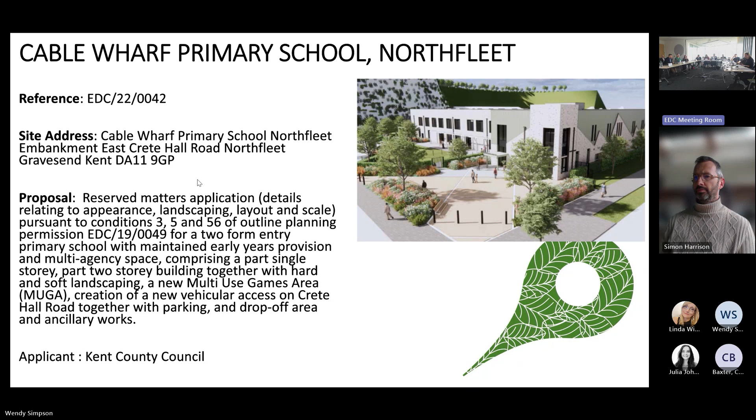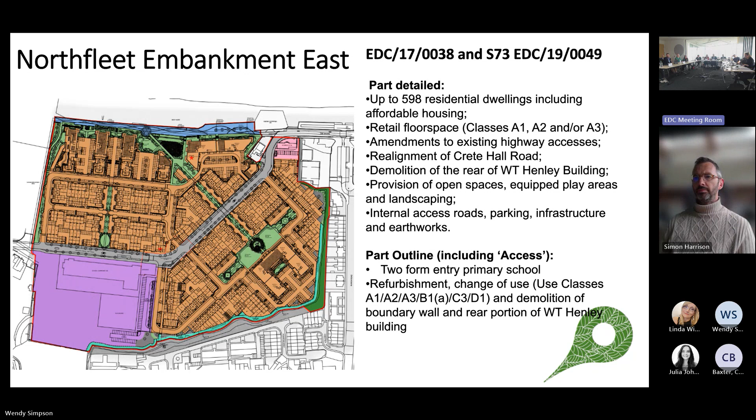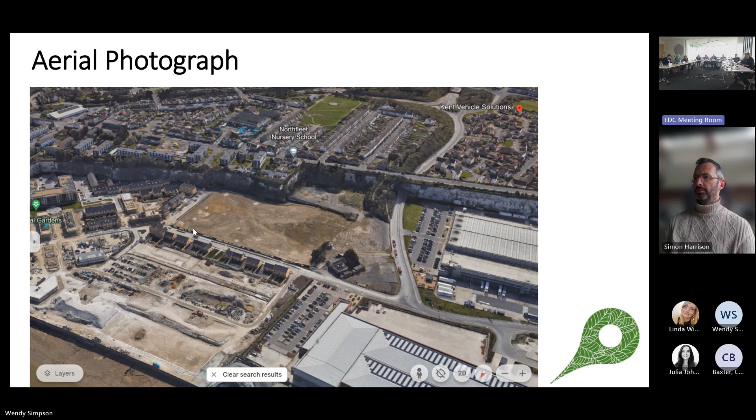The site itself was historically part of the Rosherville Pleasure Gardens and is now mostly flat and bare. The cliffs to the rear of the site are known to support roosting and feeding bat populations, and the proposal has regard to the need to protect habitat and spaces, as well as species, and to the living conditions of neighbours surrounding the site.

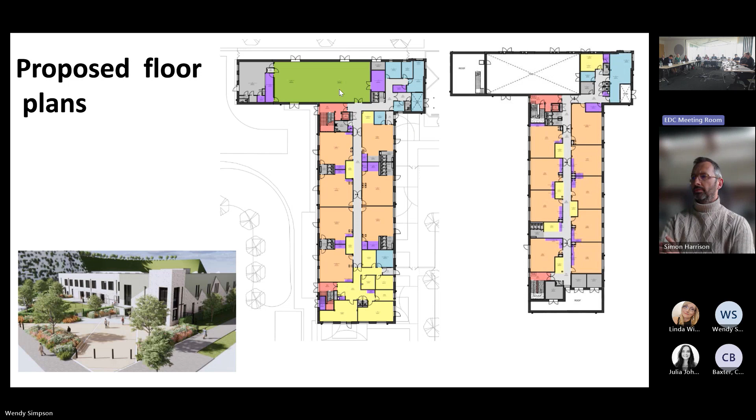Internally, the configuration of the school has 3 key areas: classrooms facing east and west, the staff area across 2 storeys, staff and admin support in the blue area in the corner of the building, and fronting Crete Hall Road is a double height school hall and kitchen.

The energy statement supplied with the application details measures to achieve a carbon net zero school, including the use of air source heat pumps with air terminals on the roof, a large photovoltaic array on the roof of the building, planting of a green roof, very airtight and efficient building fabric, and the installation of electric vehicle charging points. If carbon net zero is achieved, this will exceed the outline planning permission requirement of BREEAM Excellent as an efficiency and sustainability target.

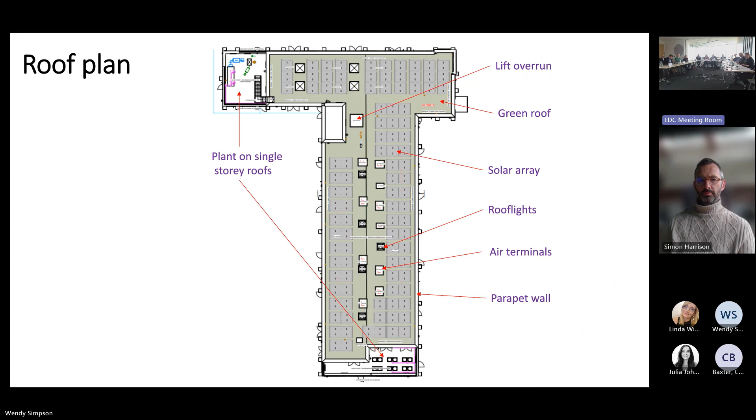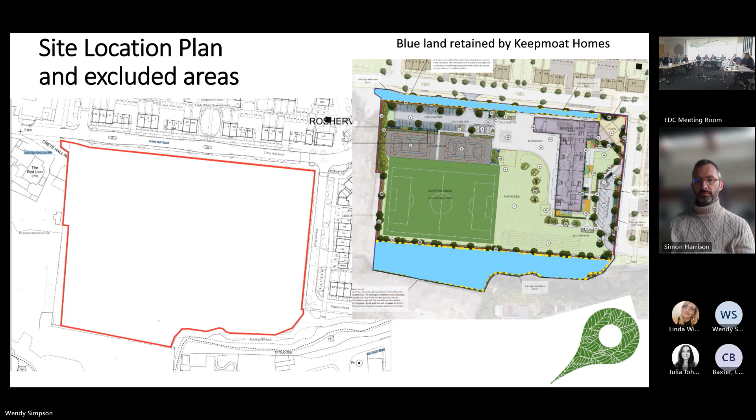The layout of the site is very logical and efficient for use both by the school and the community, which is a requirement of the Section 106 agreement. The layout allows for direct access to the classrooms on the ground floor level, and also includes dedicated outdoor teaching and play spaces on the eastern side, serving the nursery, reception classes, and a special resource provision unit. The staff car park is accessed from a new access off Crete Hall Road.

This will be available both for staff of the school and also for community use outside of school hours. We then have a drop-off and pick-up area, accessed up Maclure Road, which will be gated when the school is closed.

Externally, there'll be a 3G under-11s pitch and 2 multi-use games areas. All of these are proposed to be floodlit. Internally, for community use, the school hall and the practical classroom at first floor level will be available. A draft community use strategy has been provided with the application that demonstrates a generous ambition for community use of the school facilities, with final agreement of those details to be secured by a planning condition.

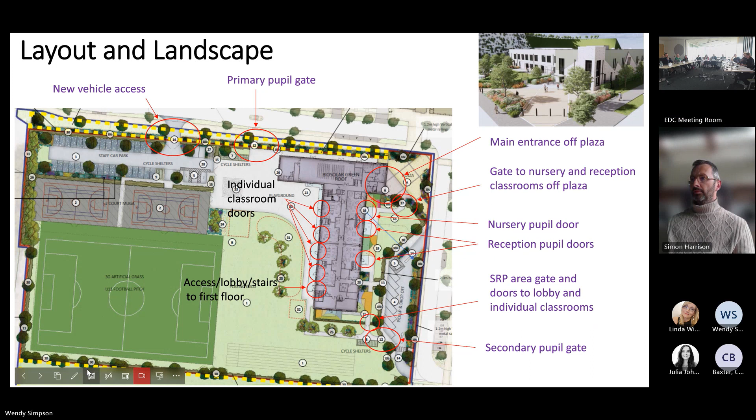In relation to the matter of scale, the school building will be mostly 2-storey with single-storey ends. Scale is considered to be appropriate in relation to the surrounding houses and will not result in harm to the neighbours' living conditions, overshadowing, or dominating their outlook.

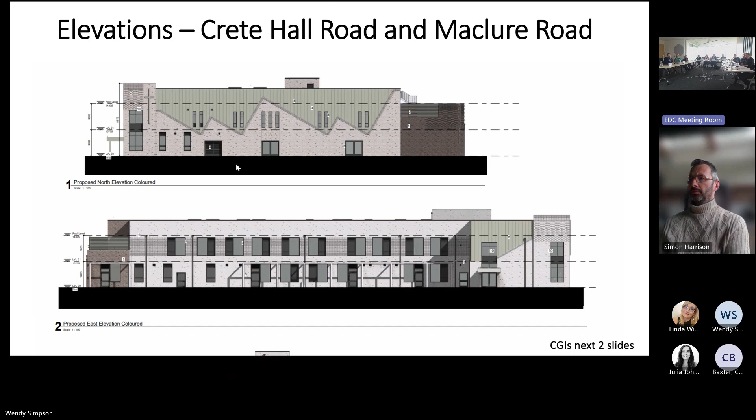The applicant has brought together a number of local references in the final architecture of the building: use of grey concrete brick in 2 tones to reference the chalk cliffs, 2 towers to reference the former Rosherville towers and the former Rosherville pleasure gardens, tall groupings of windows at the upper floor level serving the school hall on the Crete Hall Road facade referencing the local Henley building, and a sawtooth roof design on the Crete Hall Road facade referencing industrial buildings within the area.

The applicant has more recently also designed a scheme of feature brickwork to further lift the visual interest of the public facades and create more depth and variation in the brickwork areas fronting onto Crete Hall Road and Maclure Road, as demonstrated in the insets. Here is the Maclure Road elevation, again showing the feature brickwork, including between all the windows at first floor level.

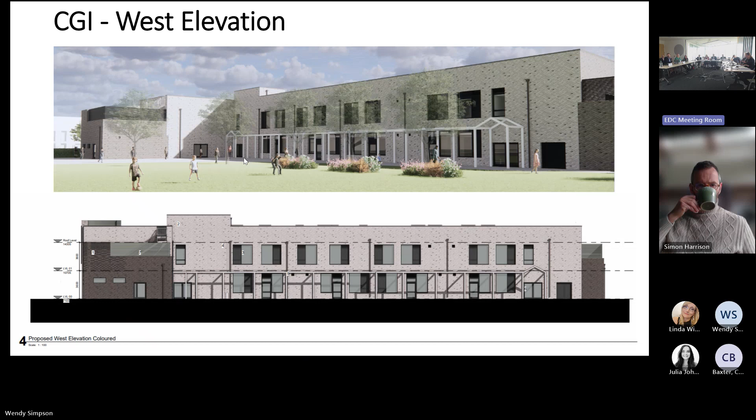This is the internal facade to the school playing fields and playground. This view also shows the ambition for the plaza entrance area of the school, which will create a welcoming and inclusive arrival point and also allow for the congregation of parents and carers waiting to collect children.

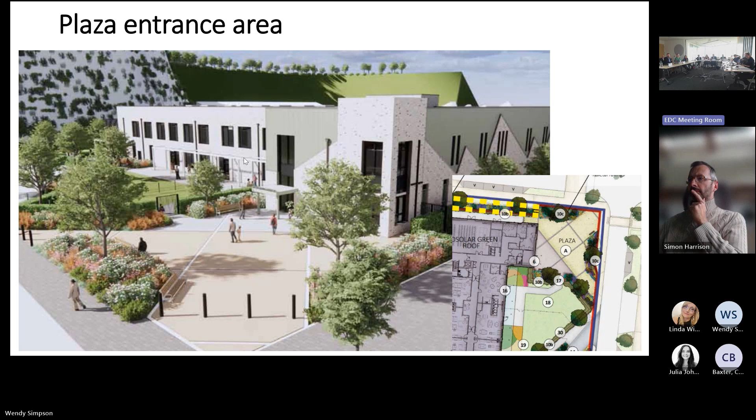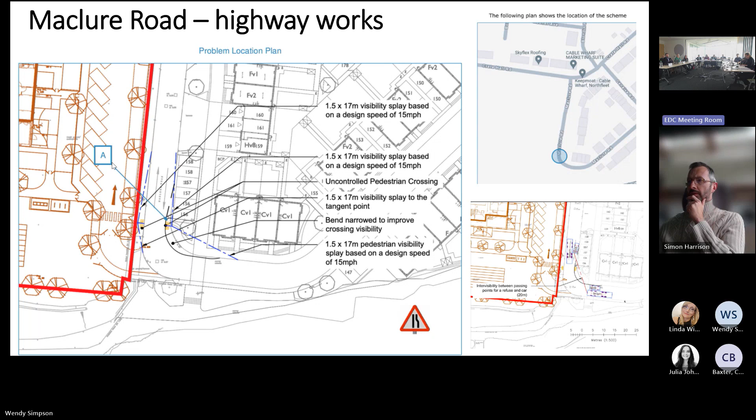The applicant has also provided a parking management plan to ensure the drop-off and pick-up area operates efficiently, and this can also be controlled by planning condition.

And so overall, subject to the planning conditions proposed and listed within the committee report, it's considered that the proposed school development would operate very well for the various ages and needs of the intended school population, and also for the community users of the site outside of school hours.

As a civic building within the area, the school would have a very distinct character, interesting appearance, and over time the proposed landscape strategy would further enhance the setting of the school building and increase the greening of the street scene.

The proposal would not result in harm to neighbours and communities, and it would acceptably address matters of ecological interest of the site, heritage interest, sustainability and traffic flow. As such, the application is recommended for approval.

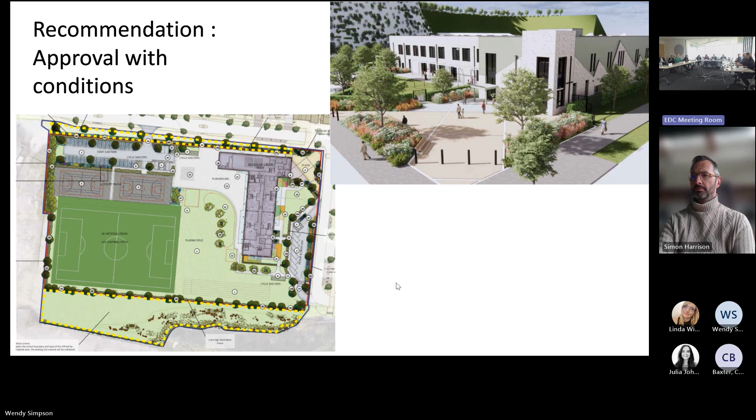Right, views, anybody? I'd like to say first that I think it's a good scheme. I think the sawtooth design depends to a large extent on the quality of materials used for it to work. I noticed there's a condition on materials, and I'm sure the officers will ensure high quality materials. I noticed the head of design turned his head at that point, but I think we do need to ensure that when the material details come in, they are of sufficiently high quality.

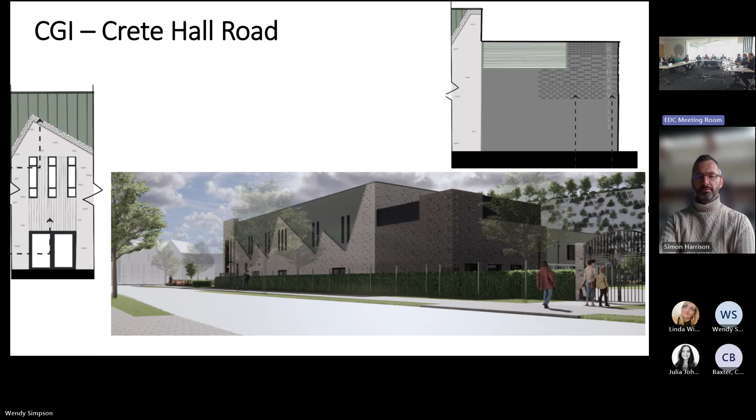That's my view. We've seen experience of this before, where they were wonderful on the CGI, but when they actually built things, it wasn't quite as sharp as it would be. So, other contributions?

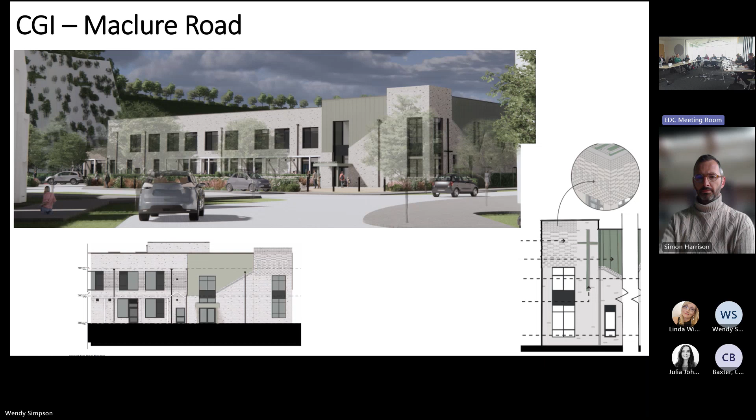As far as I'm concerned, any attractive or modern education facility used by the community is to be welcomed, particularly given the standard of many of our facilities around. So to me it looks exciting and interesting, with good community use, provided it doesn't create nuisance with lights on for sports facilities, excessive noise, or the transport of large numbers of children plus litter, which is a feature of where children tend to go as they walk towards schools.

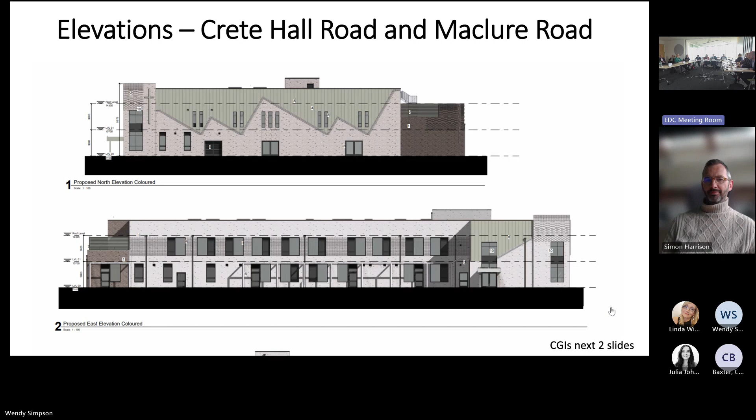Excellent. With that, let's go on to item 6, the planning activity report. This is for noting.

Mark, is there anything you wish to say about this? It's the activity report for the final quarter of the year. Thank you to the team who have been getting applications out on time. We've included some information on enforcement work in the report - I'm just trying to find it, 3.4, 3.5.

Moving forward into next year, we'll try to look at how we can provide more incremental updates on enforcement, building on the planning enforcement plan approved at the January committee meeting. We're also aware of government consultations around planning performance criteria and so on, so the way this is presented might change over the coming year. But this is for noting, Chair.

Thank you. Any questions on that? Shall we note the report? Note the report, and thank the officers for their work.

Delegated items report, item 7. Yes, there were 35 delegated decisions made between January and March. I think the committee can follow up any particular questions with the applicable officer afterwards. Anything from anybody? No, well, we note the report.